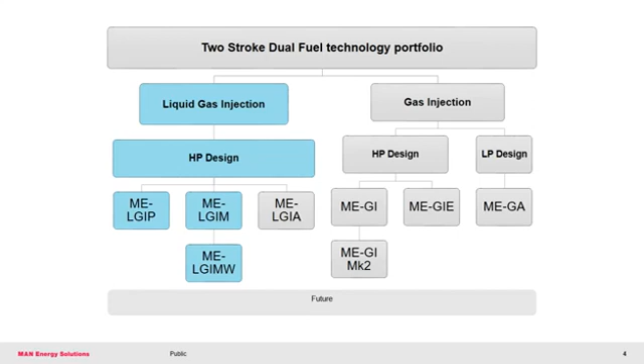On this slide, you can again see the two-stroke dual-fuel technology portfolio split into injection type as well as fuel types. On the right, you can see our gas injection engines, starting with our LNG-fueled engines, MEGI and MEGA. Furthermore, you can see our ethane-fueled engine, called the MEGIE engine.

On the left, you can see our liquid gas injection engines, starting with our methanol-fueled engine, ME-LGIM, our LPG-fueled engine, ME-LGIP, and finally our ammonia-fueled engine, ME-LGIA. This last engine is under development, as mentioned before.

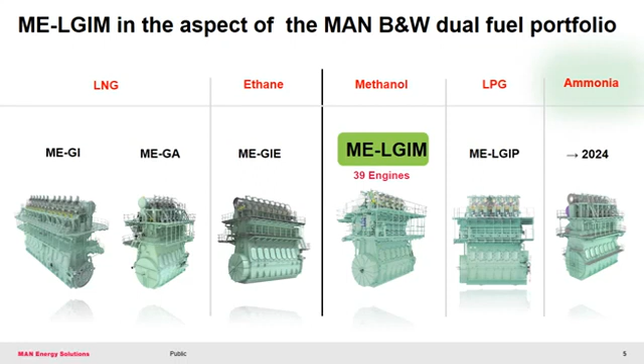Some of the main advantages of using methanol as a marine fuel are listed here. We have a proven engine design available today with more than 110,000 running hours on our methanol engines and counting. Furthermore, with methanol, we see a reduction in CO2 compared to fuel oil or MGO. And one can argue that if produced from biomass or power to X, it can be considered carbon neutral.

Storing methanol is also easy. Due to methanol's chemical composition, it remains liquid at ambient conditions. It is not necessary to take boil-off gas into account, and no cryogenic equipment is needed. It can be stored in integrated tanks at ambient temperature and pressure. Finally, methanol systems require a simple supply system. We only require 13 bar supply pressure.

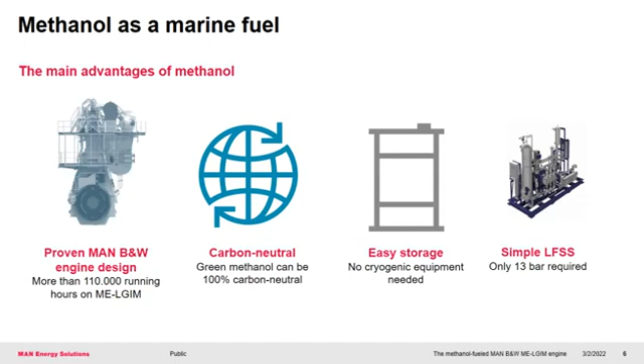On this slide, you can see a historical timeline of our dual fuel engines and development. Everything from our first MEGI tests at our test facility in Copenhagen, also called the Research Center Copenhagen, as well as retrofit projects, shop tests, and sea trials of all our dual fuel engine types. Often, testing new engine sizes and types is made available due to good collaboration with engine builders and shipyards for shop tests as well as sea trials.

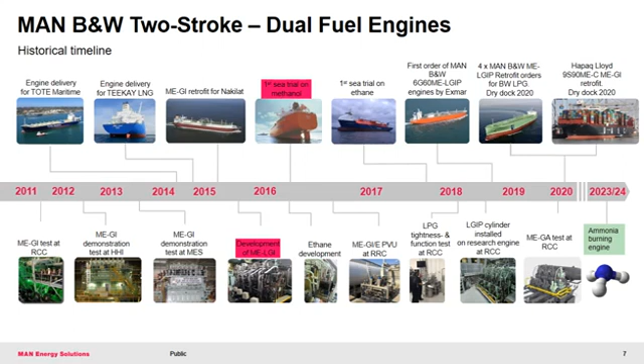Specifically for our LGIM methanol engine, you can see some of the bigger milestones here. So far, we only have our LGIM engine in service in methanol carriers. Typically, a 6G50 LGIM engine would be used here, where 6 is the amount of cylinders and 50 stands for the bore size. However, due to last year's extensive focus on sustainability and meeting emission requirements, the methanol engine has now been ordered for several other vessel types.

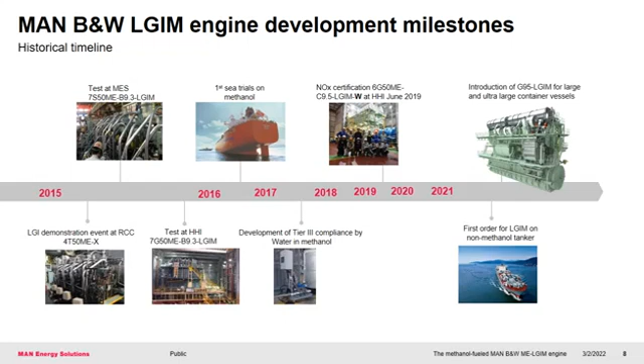We have seen orders as large as approximately 50 megawatt engines for container vessels. These orders are much larger than the typical 7 megawatt LGIM engines ordered for methanol carriers. You can see this on the right with the introduction of the G95 LGIM engine, a 95 bore engine. This, of course, creates new challenges, but within the last year we have been able to include 4 new bore sizes for our LGIM engine, as our design departments are up to the task.

The next topic on the agenda is the LGIM and LGIM-W engine type, where I will focus specifically on methanol components on the engine.

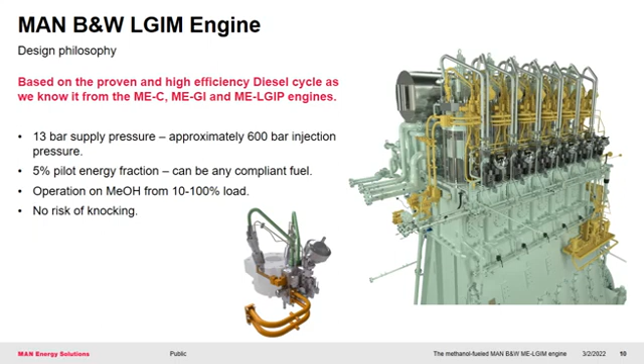The methanol engine is based on the proven high-efficiency two-stroke diesel cycle, a concept we have a lot of experience with. Specifically for the methanol engine, we have 13 bar supply pressure, which reaches approximately 600 bar injection pressure using hydraulic oil. The methanol temperature to engine should be 25 to 50 degrees Celsius. It is necessary to apply pilot oil to ignite the combustion. The pilot oil amount is 5%, using any compliant fuel. The methanol engine can operate on methanol in the range of 10 to 100% engine load.

This is a close-up of some of the components located on the cylinder cover, relevant for the methanol engine. There are components for hydraulic oil, pipes, accumulators, and valves. 300 bar hydraulic oil is supplied from the hydraulic oil system, and it raises the methanol to an injection pressure of approximately 600 bar in the fuel booster injection valve.

The fuel booster injection valve, also called the FBIV, is designed to boost the methanol to reach injection pressure. Furthermore, it is designed to minimize the risk of hydraulic oil and methanol potentially mixing. A sealing oil system is used to mitigate this. The drained and used sealing oil is then recirculated to a separate sealing oil tank in the sealing oil unit mounted on the engine, which handles potential methanol contamination in a safe way by ventilating and monitoring it.

You will also see dedicated methanol components, such as chain pipes mounted on the adapter block, which is part of the gas block. In the following, you will see some more of these methanol components.

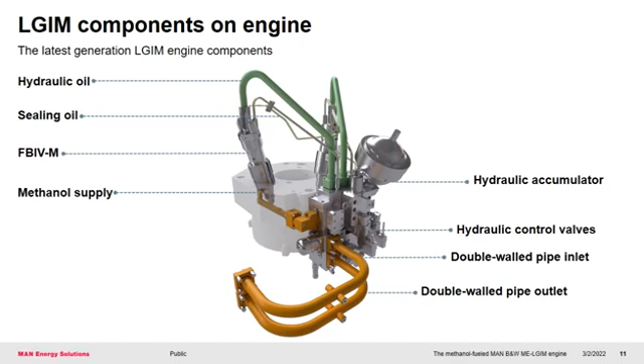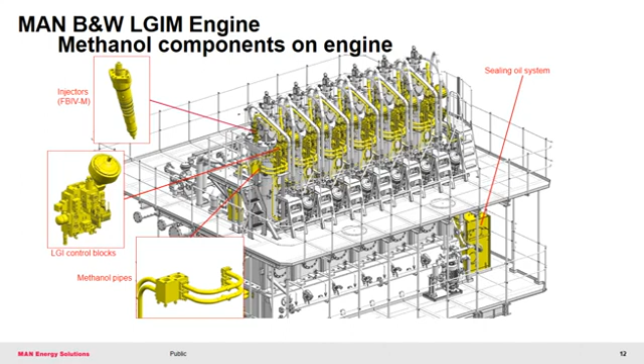The methanol chain pipes supply and return methanol from the main engine inlet flange, from gas block to gas block. The chain pipes are of double wall type and are ventilated with a minimum of 30 air changes per hour.

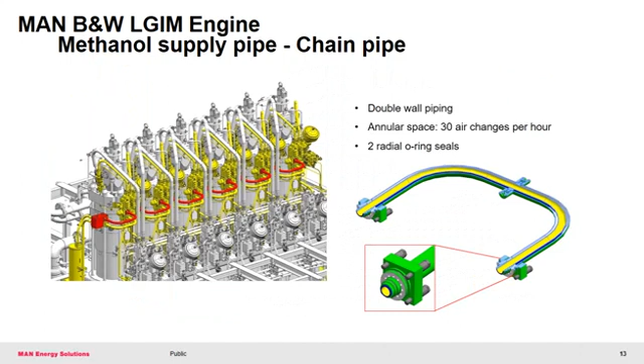The gas block is divided into the control block and the adapter block. The red line marked here indicates the control block on top and the adapter block below. The control block is mounted on the cylinder cover. It receives methanol from the adapter block and directs it to the FBIV for boosting and injection. The adapter block is mounted under the control block. It supplies and returns methanol from gas block to gas block in the starting, operating, and stopping sequences of the engine.

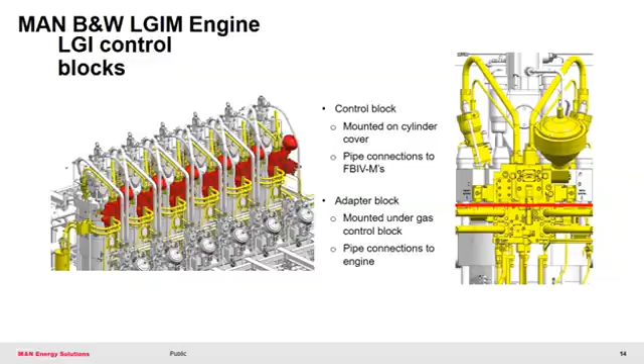The next topic on the agenda is Tier 3 technologies, specifically the water and methanol technology, which is only applied for the methanol dual-fuel engine. The typical standard Tier 3 technologies as you know them are EGR, exhaust gas recirculation, and SCR, selective catalytic reduction. Specifically for the methanol dual-fuel engine, we have, however, removed the SCR technology from the Tier 3 portfolio. This was necessary in order to optimize our methanol Tier 3 portfolio when introducing water and methanol as a new Tier 3 solution.

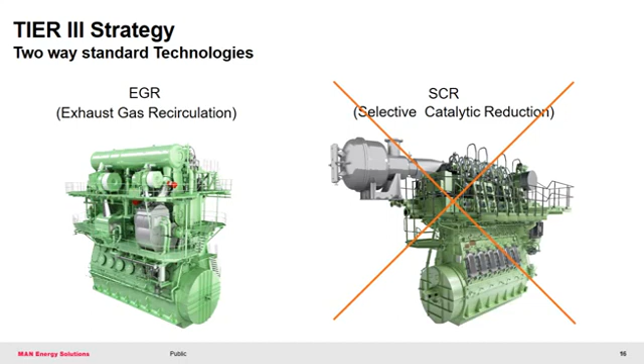Using methanol itself as a fuel includes a NOx reduction by 30 to 50% without any further NOx abating system. We have researched and tested the possibility of mixing water with methanol. Mixing water with methanol reduces the combustion temperature, and therefore NOx emissions are not created to the same extent as in a combustion without water. Mixing the correct amount of water will ensure NOx emissions meet the Tier 3 requirements.

We have found that water mixes well with methanol. Therefore, a simple injection of water into the methanol supply line will suffice. It is necessary to ignite the mixture using pilot oil in order to reach a proper combustion, as it is for regular methanol operation without water mixed in. For injection of the pilot oil, we use the fuel injectors.

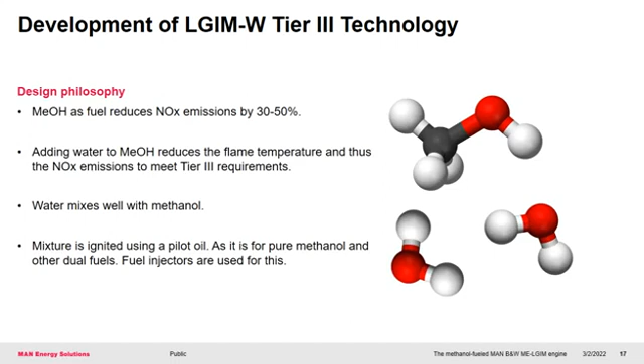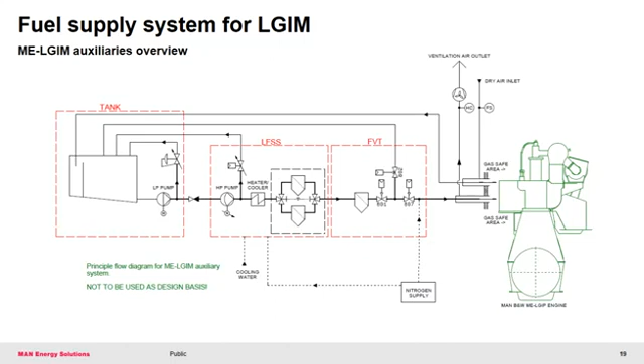On this slide, you can see a system overview without water as a Tier 3 technology. It was necessary for us to consider where the most optimal position was to include the water injection.

We chose to insert the water in the fuel valve train. Why the fuel valve train? The FVT includes a double block and bleed valve system, valves 801, 807, and 802, to separate the methanol high-pressure supply from the consumer, which is the engine. The block valve 801 in the methanol line can also be considered a master valve.

This idea was also adopted for water. By separating water from the methanol with a double block and bleed valve configuration, the water injection unit does not need to be X-proof and can be placed in the engine room. This was a more cost-efficient option for the shipyards than if it were to be X-proof.

Furthermore, the FVT is a controlled component. The MAN engine control system can control the injection of the water.

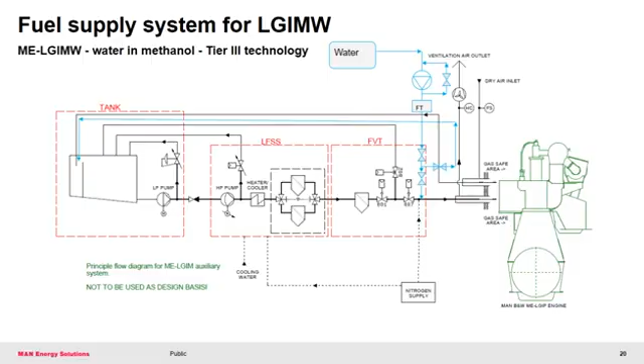The next item on the agenda is the auxiliaries and installation. First, I will give you an overview of the auxiliary components related to the methanol engine and systems.

Here you can see an overview of the different subsystems related to the methanol engine. On the left, you can see the methanol fuel service tank, which holds the methanol dedicated for engine operation. The methanol is stored in the fuel service tank at ambient pressure and temperature conditions.

To the right, you will see the nitrogen system. The nitrogen system ensures sufficient N2 for purging the engine and nitrogen for purging the fuel supply system.

On the top right, you see the fuel valve train. The fuel valve train has the purpose of separating pressurized methanol from the engine.

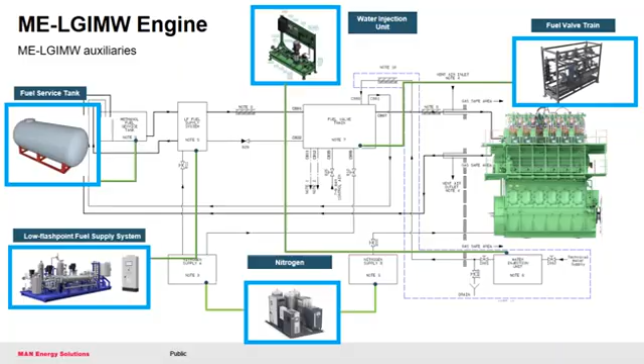I will now go through the mentioned and most important subsystems that ensure proper methanol running according to our specification. The purpose of the fuel supply system is to ensure that the delivered methanol is living up to the specified requirements regarding pressure, temperature, and filtration.

The supplied pressure should be 13 bar. The supplied temperature should be 25 to 50 degrees Celsius. And it is required to filter the methanol with a duplex filter of 10 micron absolute. By installing a duplex filter, it is possible to change over more or less seamlessly if one filter is full.

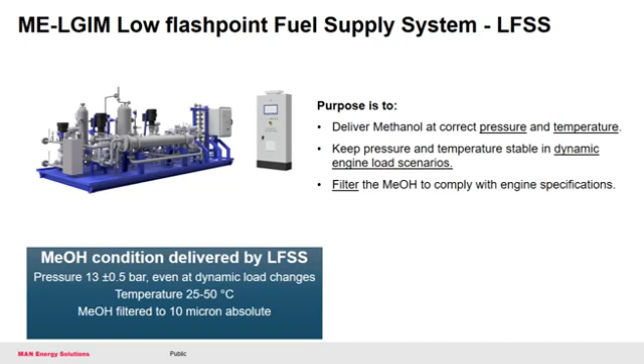The purpose of the fuel valve train is to isolate the engine from the pressurized methanol supply systems when not running. Furthermore, connections for nitrogen purging are available. The fuel valve train is a controlled component, and therefore the valve train must be approved by MAN as it is part of our safety concept. Furthermore, it is controlled by our engine control system.

The FVT includes automatic shutoff valves, which are pneumatically actuated. The FVT is supplied by Electronic Fuel Tech, which is at the moment the only approved vendor of the FVT. In their portfolio, they have a 1-inch FVT and a 2-inch FVT for different engine power outputs.

The 1-inch FVT will cover engines up to approximately 10 megawatt power output, and the 2-inch FVT will cover engines up to approximately 55 megawatt power output.

Due to growing market interest in the methanol engine, we have now considered it necessary to investigate the possibilities of including a 3-inch FVT for larger engine power output than 55 megawatt. And since 60 bore, 70 bore, and 80 bore engines are now in our methanol portfolio, we may also look into including a 1.5-inch FVT for intermediate sizes.

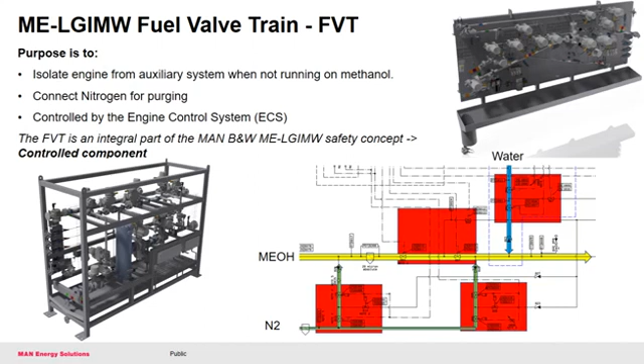Finally, if water and methanol is chosen as a Tier 3 solution, the FVT will include the water valves marked in the top right red box, valves 860, 861, and 862. This is simply an option. Therefore, the FVT can be ordered and delivered without these valves and later retrofitted.

The water and methanol technology requires a water pumping unit. We call this the water injection unit. Its purpose is to ensure Tier 3 compliance by delivering water to the FVT where it mixes with the methanol and is delivered to the engine for combustion, thereby emitting less NOx.

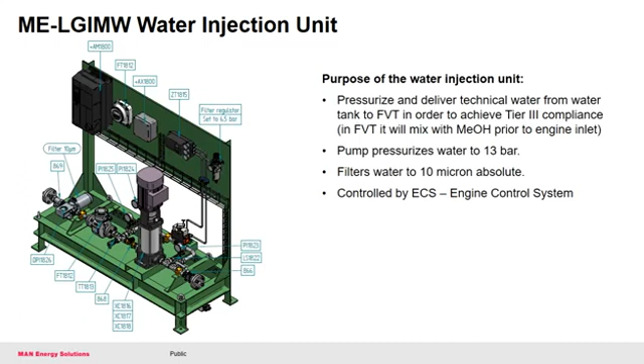The water injection unit pressurizes and delivers water to the FVT at 13 bar. Furthermore, a filter is included to filtrate the water at 10 micron absolute to meet engine requirements. The water injection unit is controlled by our ECS, and therefore we can control the mixture of water and methanol and ensure Tier 3 compliance at different engine loads.

The purpose of the nitrogen system is to supply nitrogen for purging of the methanol pipes. We also use nitrogen to run an automatic assembly test or verification test at every startup to ensure that all valves, transmitters, and components are working. Finally, we use nitrogen to tightness test the systems after overhaul or maintenance.

The tightness test pressure is 13 bar. Purging pressure is minimum 8 bar, and assembly test pressure is the same as the purging pressure. In some situations, we see that shipyards choose to use 13 bar for all purposes. This would still be in line with our specs, and you would obtain faster purging and startup sequences.

A common nitrogen system would be beneficial. However, we require separate nitrogen supplies, supply A and supply B, with separate buffer tank or storage and separate piping. This is why.

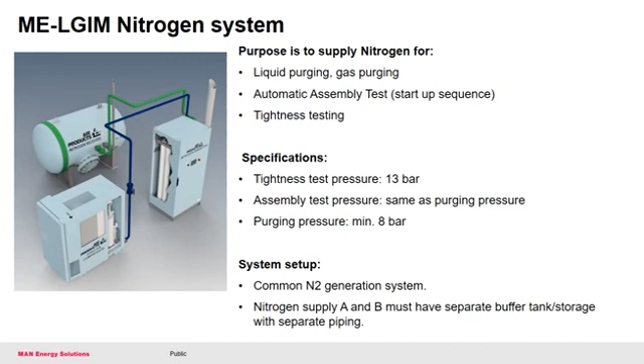The purge modes justify the necessity of having a nitrogen supply A and nitrogen supply B with separate buffer tank or storage and separate piping.

Purge mode 1 is used during startup and supplied by nitrogen supply B. Purge mode 2 is used during stop mode and supplied by nitrogen supply A. No matter what happens to nitrogen supply B, nitrogen supply A should always have nitrogen available at correct pressure in order to stop or shut down the methanol operation.

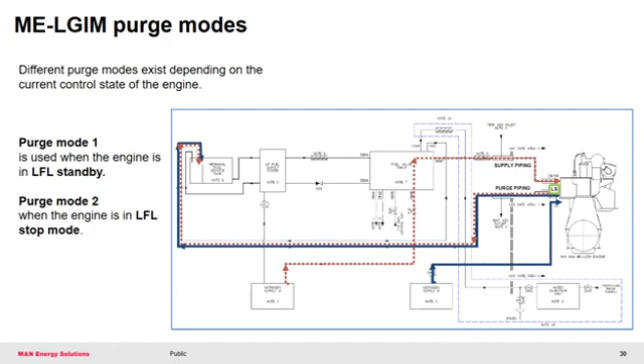We will explain how the purge modes are integrated in the different engine sequences later on in the presentation.

The purpose of the methanol fuel service tank is to have a dedicated tank to accumulate methanol for engine operation. Furthermore, it should be able to separate return contaminated methanol from the ready supply of methanol for operation.

The returned methanol will be contaminated with sealing oil and nitrogen, and the sealing oil will settle to the bottom of the return compartment. The methanol will stay on top and spill over to the fuel compartment to be reused. If the level switch detects the sealing oil, then the return compartment should be drained.

With a dedicated methanol service tank with return capabilities, it is possible to completely separate the methanol from the service tank, that is, from the engine, with the methanol from the cargo or storage tanks, thereby not contaminating the cargo or storage tanks. The service tank should also be equipped with nitrogen padding and a PV valve in order to

compensate for the pressure or vacuum related to emptying or filling of the tank. During purging, engine operation, and service tank filling, pressure and vacuum is created respectively. This is handled by the nitrogen padding and PV valve.

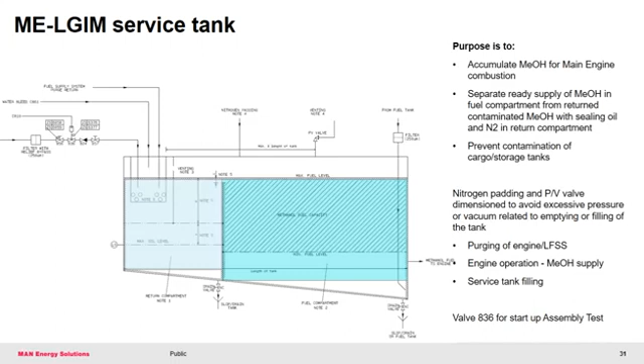Finally, it is important to include the valves required where valve 836 is necessary for the assembly test in order to start up methanol operation.

Our dual fuel system includes double wall pipes on the engine, as well as yard piping downstream the FVT, according to IMO rules. The double wall pipes are ventilated with minimum 30 air changes per hour. We require dry air. The outer pipes are outer pipe tested prior to methanol operation.

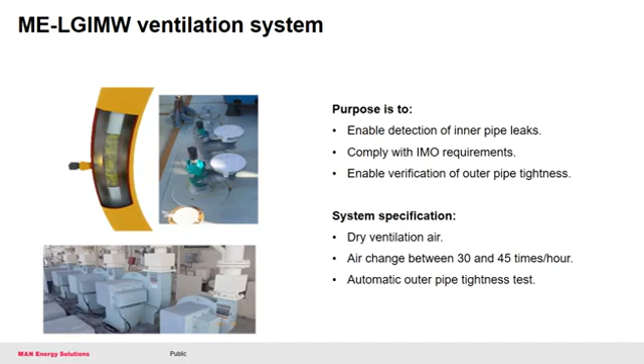Here you can see the ventilation system. On the left, you see our double-wall ventilation system, including redundant gas detection downstream the engine, redundant flow switches upstream the engine, the ventilation fan, as well as other valves and components for outer pipe testing and air inlet.

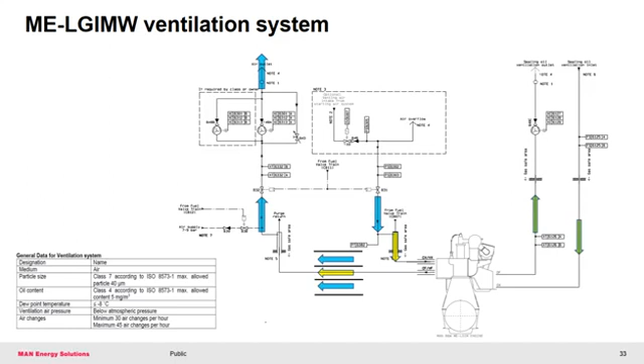As mentioned previously, we require dry air for the double-wall ventilation system as shown in the table on the left. Furthermore, for the methanol dual-fuel engine, we require a sealing oil unit, as mentioned previously. This sealing oil unit is ventilated and also equipped with gas detection, ventilation fan, and flow switches. We, however, do not have strict requirements for the air used for the sealing oil ventilation system.

I will now take you through some of the sequences of operation for the methanol engine.

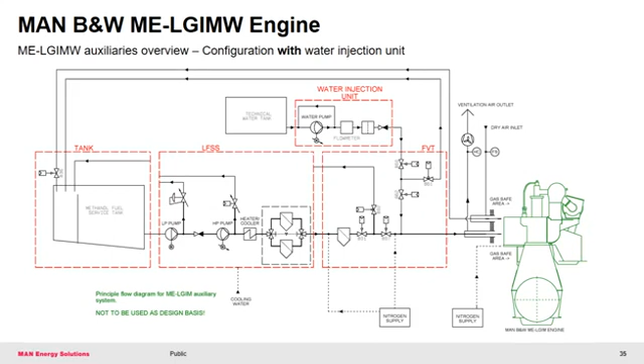Firstly, you can see a simple flow diagram for explanation purposes only. This should not be used as design basis. You can see the relevant subsystems, such as the service tank, the fuel supply system, the FVT, the nitrogen supply, the water injection unit, and the engine.

The first sequence of operation is prior to methanol operation. It is necessary to run an assembly test, also called verification test, in order for our engine control system to allow for methanol on the engine.

The assembly test is run using pressurized nitrogen at purging pressure. As you can see, the block valves 801 and 807 are closed in the FVT, sealing the engine from the pressurized methanol from the fuel supply system.

In order to pressurize the engine and components, valve 836 on the service tank is closed. Once assembly test is passed and all components, transmitters, and pipes are as expected, we can move on to the next part of the startup sequence.

The second sequence is the filling scenario. The filling scenario is split into two parts. The first part you see here, where we open the double block and bleed valve arrangement in the FVT methanol line.

Block valves 801 and 807 are opened and bleed valve 802 is closed. Keep in mind that block valves and bleed valves always work oppositely in a double block and bleed arrangement. When one opens, the other closes.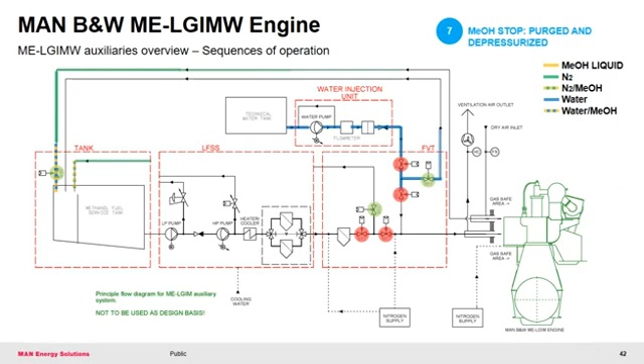I have now gone through the presentation about our methanol engine and auxiliary systems. Before we finish, I would like to show you how to access our installation documentation, which includes specifications for the components and subsystems mentioned in this presentation. This will be the final item in this presentation.

Keep in mind that the documents are provided as information only. The formally valid documents are included in the Engine Builder's design specification order.

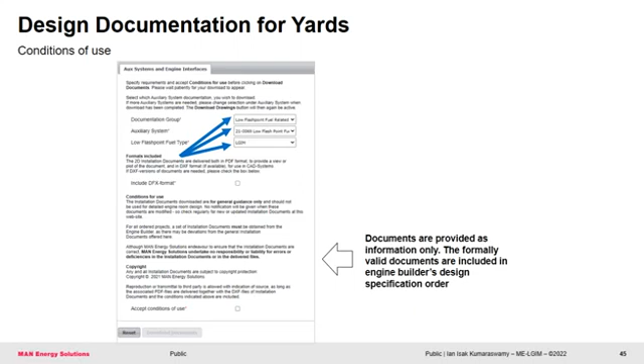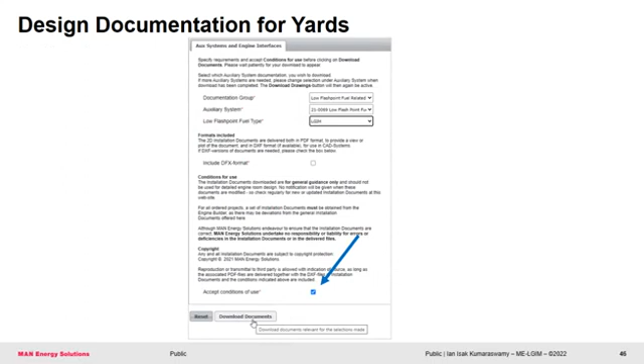Before you can download the document, please remember to accept the conditions of use by reading and checking the box shown with the blue arrow. Then download the documents.

Once you download them, open the compressed file and you will see the following documents available for methanol. Find the relevant document for you and open it. In this case, I have opened the system diagram.

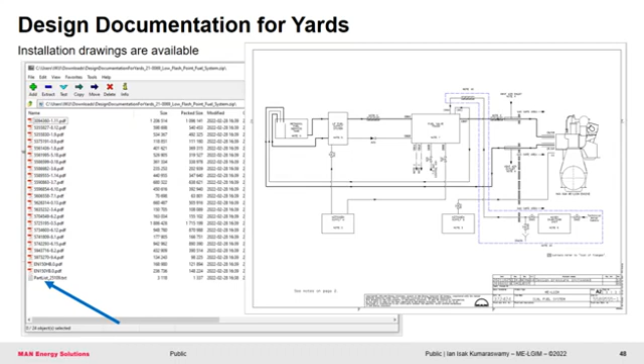Document 5589555-1. If you need an overview of what documents are included in the folder, feel free to open the part list shown with the blue arrow. A table of the folder content is available here to see what the folder includes. Keep in mind that when you download this package, you will always be receiving the latest revisions available.